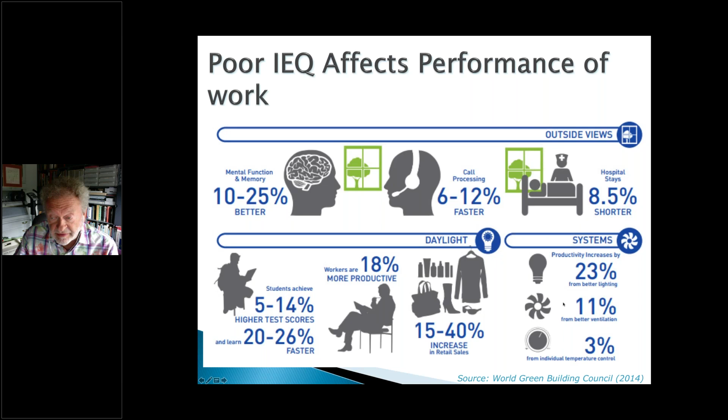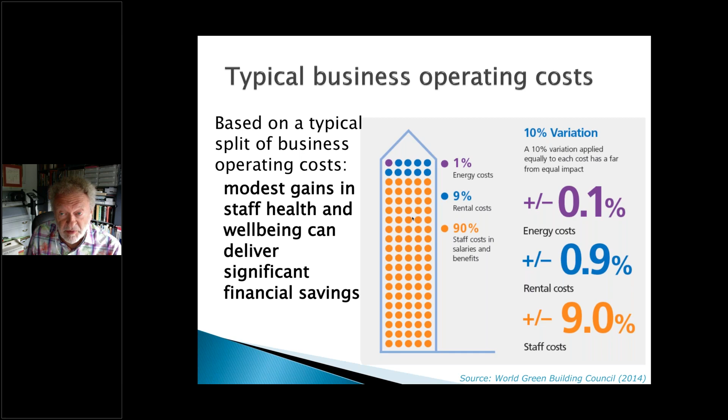When we look at the cost you have in a modern office, it is very important to stress that if you look at the building, the cost you have for salaries and benefits—if you put that at 90%—the energy cost for heating, cooling, and ventilation is only 1% of that. So the performance of people is very significant. You can say about 1% loss of productivity is the same as the total cost for the ventilation and conditioning of the building. So that's very important to have in mind when we now talk about performance and productivity.

And then we have what we often see in modern offices: many people get headaches or runny nose and eyes. We call that sick building syndrome. And we know that by better ventilation, we can reduce the amount of sick building syndrome, which causes loss in productivity of people.

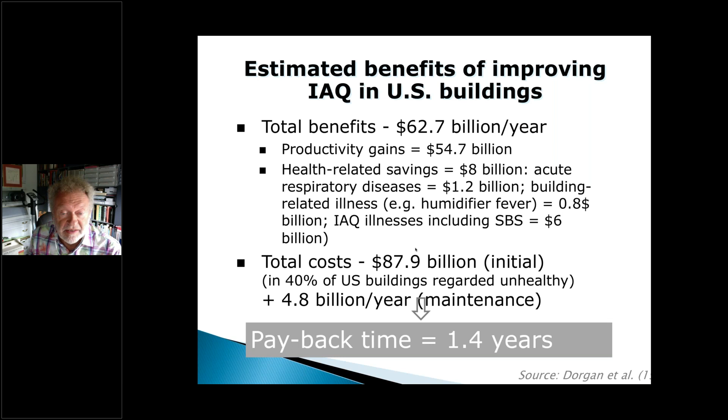So by investing in the indoor environment, there are a lot of gains that you can have. Here are some estimated benefits of improving indoor air quality in US buildings. I will not go into detail, but they have calculated that the benefits will be like 62.7 billion per year, where the cost for improving the indoor environment is close to 90 billion. But since you have yearly benefits, the payback time is only about 1.4 years. That's why the cost of people is much higher than the cost of energy or new installation.

So let's look a little at the exposure of the environment on our body. Here's a couple of numbers which tell us what we put into our body every day. People on average eat maybe around 1 kilo of food, though of course there are big individual differences. We should drink about 2 liters, or 2 kilos, of liquid—here I'm thinking about water. But I don't think many people believe that you are breathing 15 kilos of air every day. So there's 15 kilos of air going down into your breathing system, into your lungs, and coming up again. So you can see the exposure to air on your body, and the quality of that air is very important.

Another important factor is the exposure time—how long are you exposed to a given environment? Most of us spend more than 50% of our time indoors in our home. So the indoor environment we have in our home is much more important for our health and wellbeing than at the workplace. But we're also spending time indoors in public premises, in industry, and while traveling. So altogether, in general, we are spending more like 90% of our time indoors. So the indoor environment is very important for our health and comfort.

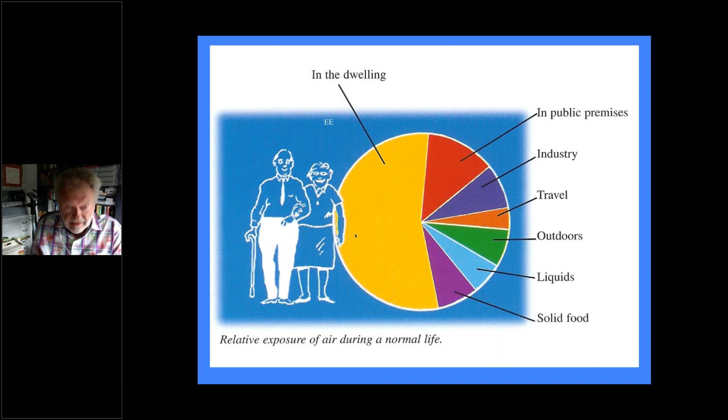So when we talk about indoor environmental quality, there are physical factors that are important: thermal comfort, related to temperature, air velocity, humidity; air quality, which we often relate to how much we ventilate; noise and acoustics; and also lighting or illumination. What's also important is how long you are exposed to given conditions—that's why the conditions in your home are so important, because you spend more time there than anywhere else.

Then there are some personal factors—for example, the activity you are doing and the clothing you wear are important for your comfort, whether you feel warm or cold. We also see some adaptation and change in expectations toward the indoor environment. These are the factors we look at when we want to evaluate if an indoor environment is acceptable.

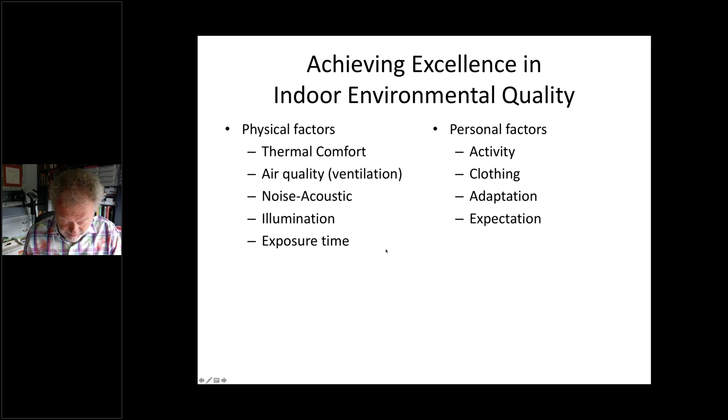There are big differences when we look around the world at what people's exposure is. Here are some data from WHO on the global health impact on people: in developing regions, like 5,000 persons die per day due to poor indoor air quality. That is typically children and women who are exposed to cooking indoors without ventilation, with a lot of particles and different chemicals generated by fires or cooking. In developed countries, we have seen a very significant increase in asthma and allergy, which I will come back to.

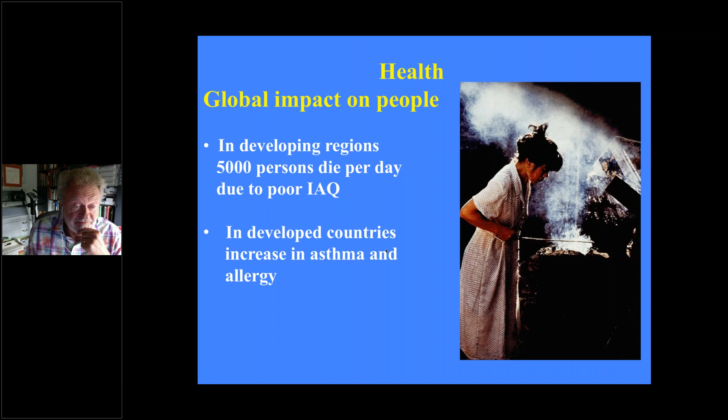But we also have people who are so sensitive that even if we do our best to create the best indoor environment—the best temperatures and indoor air quality—they are still not satisfied. It's like the fairy tale from Hans Christian Andersen, the Princess and the Pea, who is so sensitive she can feel a pea even under 10 mattresses. People are very different, so it's very difficult to create an indoor environment where everybody is satisfied. We have to realize that from person to person, there can be big differences in what they find acceptable.

So I talked about asthma and allergy, and data are showing that it is increasing in industrial countries. We can see that from school children, but also from adults.

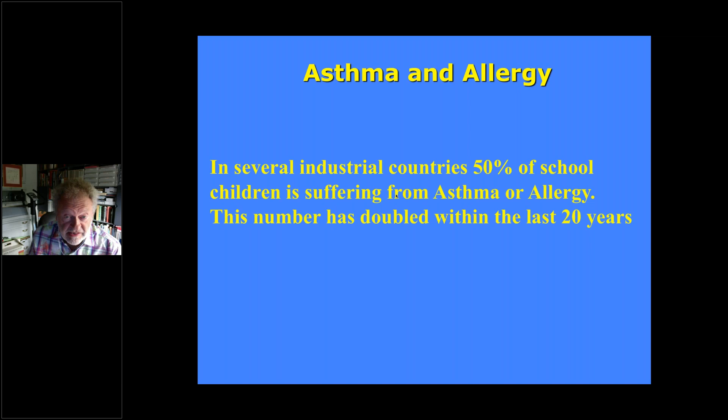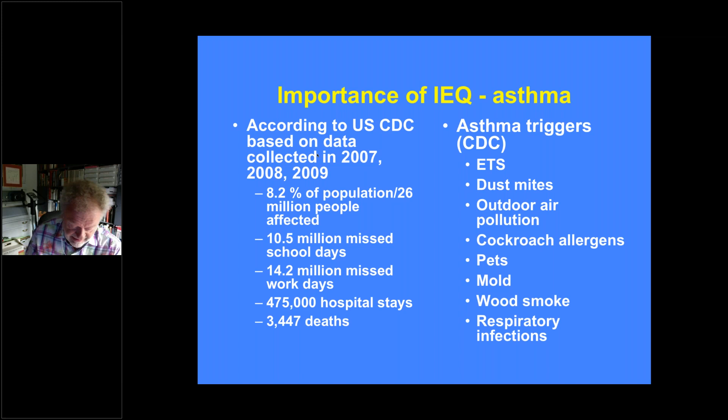In some of the homes we knew there were children, and we tested them to see if there was asthma and allergy, and there were other homes where there was no asthma and allergy. So there were both medical people involved.

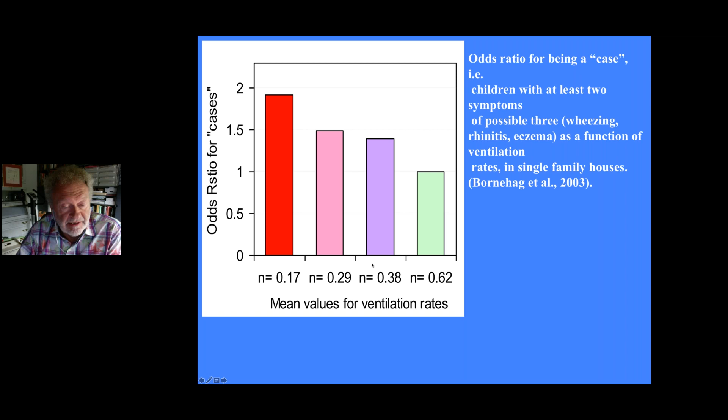When we look at this graphic, on the x-axis we have how much we ventilate, that's how many air changes per hour the homes are ventilated with. The outside air in these areas in Sweden is fresh, very good outside air. We can see here, if we reduce the ventilation, the odds ratio that there is a case of asthma and allergy is much higher. So in homes that are less ventilated, the risk that people get asthma and allergy is higher.

Now, what is 0.38 or 0.62 air changes per hour? I can say, for example, in Denmark, the recommended ventilation rate at home is about 0.5.

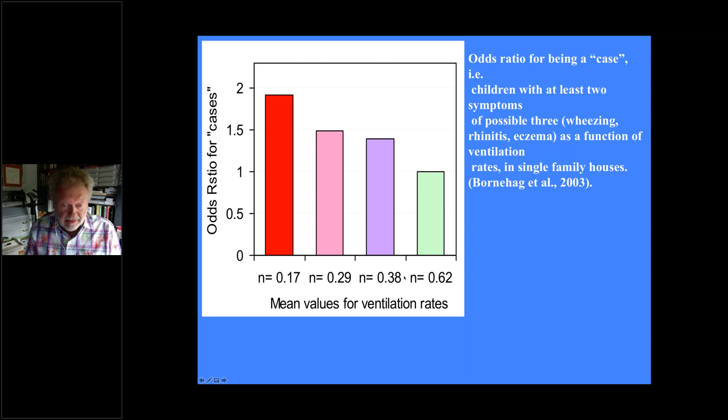We have seen from other studies that this phthalate goes into your blood and can result in asthma and allergy. So it's good to always have a certain level of ventilation. I said in Denmark we recommend half an air change per hour.

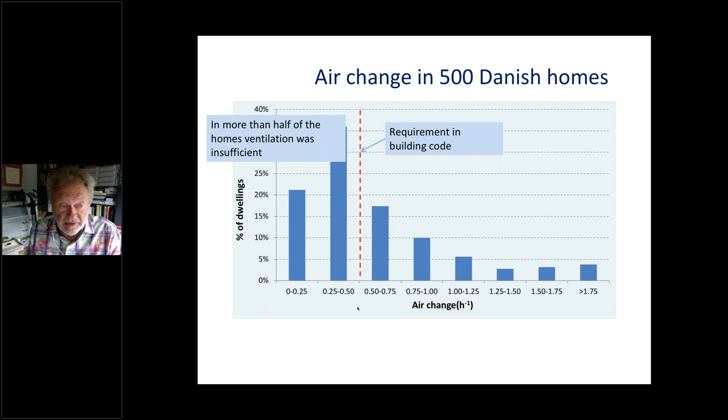Now, I talked about the PVC flooring used a lot in Sweden, that has phthalates and can get into the body of people. But there are a lot of other products, like plastic products, that include phthalates that we bring into our homes. It's through furniture, in our cleaning products, I mentioned toys, in cosmetics, and in paintings. So there are a lot of different chemicals we are bringing into our home, and that's why it's so important to have some level of ventilation.

A big problem is that there are chemical reactions taking place, which is why it's very difficult to do measurements and evaluate the indoor environment and indoor air quality by measuring a lot of different substances. That's why, normally, both in ASHRAE standards and others, we require a certain minimum ventilation.

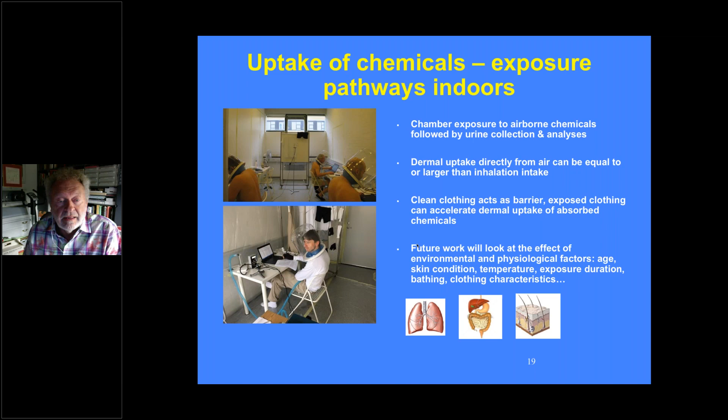So when we want to study the effect of a source, a certain emission from a building material or another consumer product, what is the health effect? What is the effect on asthma, reproduction, autism, obesity, or diabetes? We engineers cannot do that alone. What engineers can do is characterize the sources.

We can measure the exposure—the chemicals, the particles in the indoor air—so we can say what people are exposed to. We can also look at the modifying factors, for example that if you increase ventilation, the source strength will get less. So all of this we can help estimate, calculate, or measure.

But then how it gets into your body through dermal or inhalation uptake—I mentioned we did some studies on that with medical people. We may be able to help find the pathways, but what's happening inside the body, how to analyze blood and urine for what has been absorbed, what the biological mechanisms are, and then explain how it affects health—we need to work with medical people. It's very important to have the whole chain from the source to the health effect. It's not only engineering work.

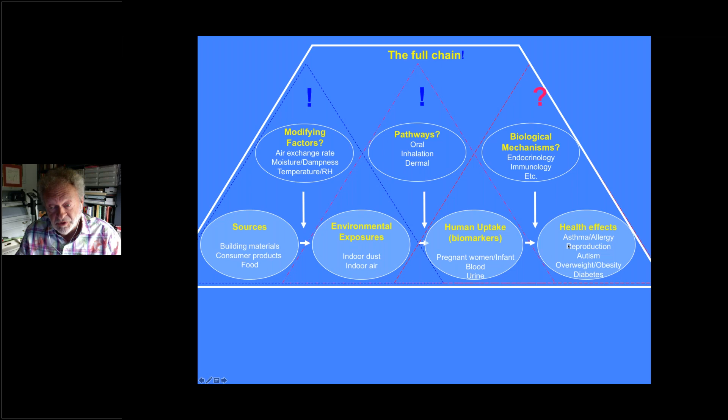Another problem is that some of the health effects are very long-term, not immediate, so it can be very difficult to detect.

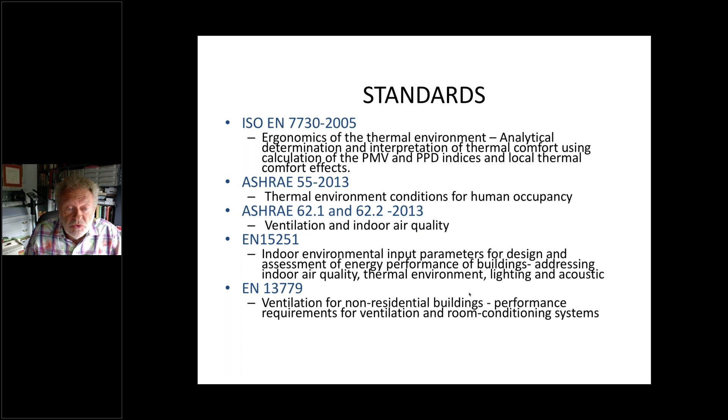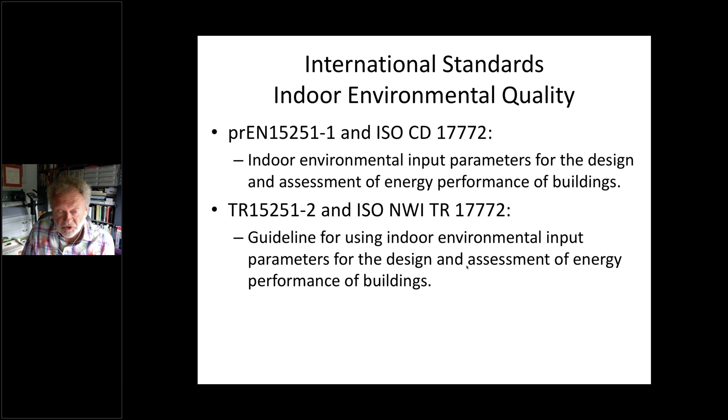To help people design buildings and systems, we often use standards—international standards from ISO, European standards, and ASHRAE standards. There are two newly released standards which are very similar: one is an ISO, now a full standard, still marked as CD but actually complete, and there's a European one. These deal with parameters for the indoor environment—thermal environment, indoor air quality, acoustics, and lighting. Similarly, India has a standard dealing with the indoor environment, and these are somewhat related to the international standards.

So now let's look a little at exposure to the thermal environment and how it influences productivity.

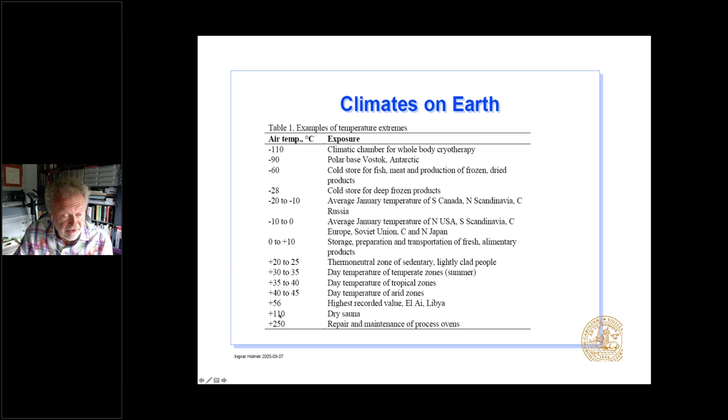We are capable by different means to work in environments that go from -110 close to that. For example, in the Antarctic, you have -90, where people work, but because of protective clothing, they can do that for some time. And we have people exposed voluntarily to very high temperatures, like 110 in a sauna, but also people who do repair on ovens, for example, in glass factories. So by protective clothing and other means, we can work in a big range of temperatures.

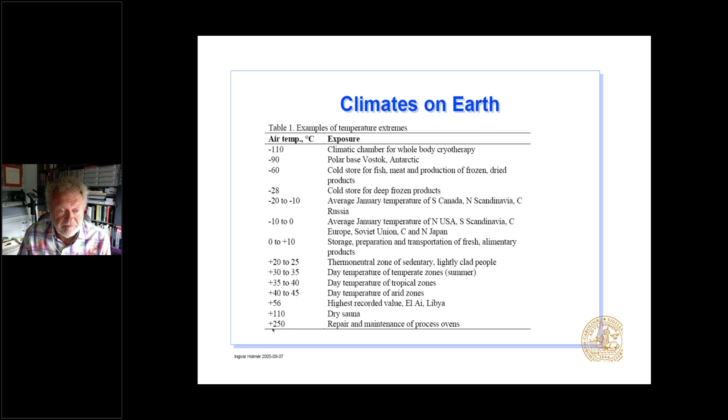But if we look at our body temperature, we can only survive in a very narrow range of 6 to 10 degrees. So what's important for us is that the body temperature for our health does not change very much. So we need to have a heat balance between the heat we are producing by the work we are doing.

Here the weightlifter is lifting a weight and his body generates heat. This heat is released to the environment by convection to the air, by radiation to the surrounding surfaces, by evaporation, which when it gets warmer and warmer gets more and more important, and some heat exchange, but very little by respiration and direct contact with surfaces.

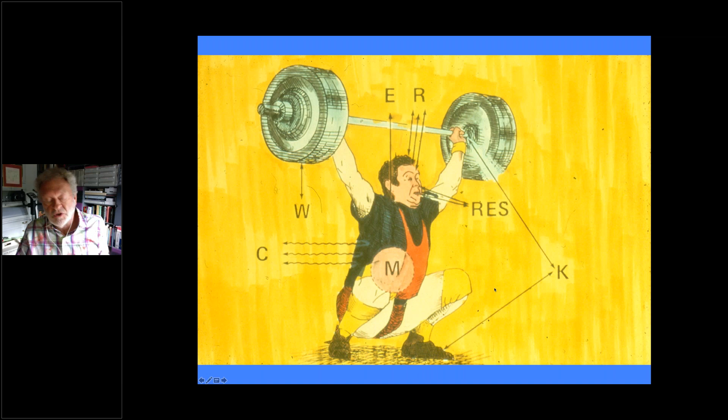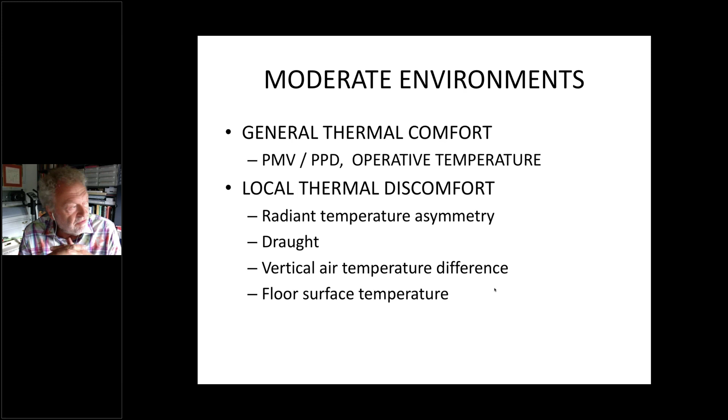So this heat balance has been important for establishing some of the criteria we use to evaluate indoor comfort. And today we express general thermal comfort either by a level of operative temperature, or there is an index we're using, the PMV-PPD.

But there are also influences of what we call local thermal discomfort, from too high air velocities, which sometimes can be beneficial if you're too warm, but in air-conditioned places it's often a disturbance if you have too high air velocities.

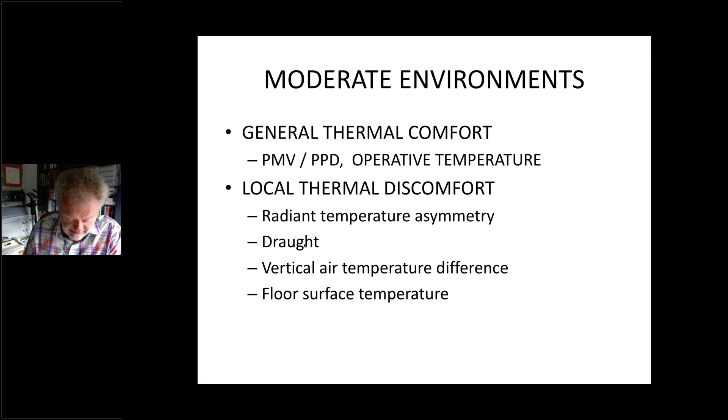If you are close to the optimal comfort, around 0, you also have the optimal performance. It seems like if you're just a little on the cool side of the neutral temperature, you have the highest performance. If it gets colder, the performance goes down. If it gets warmer, the performance also goes down.

When it gets warmer, people get more tired, they get headaches, and they lose concentration. When it gets colder, for example if you're working on a computer keyboard, fingers get more stiff, and you make more mistakes. So for temperature, there's reduction both on the cool side and on the warm side.

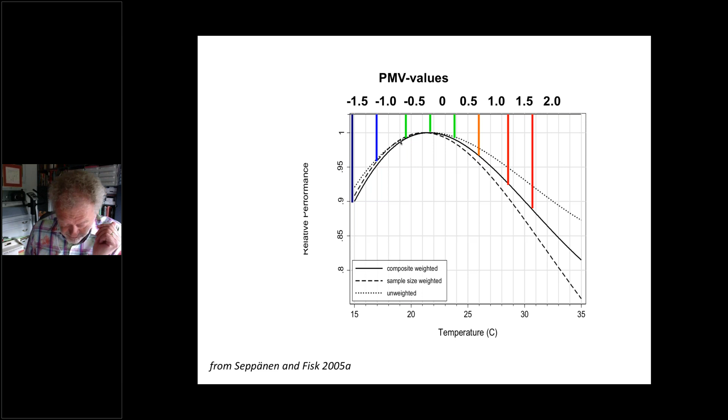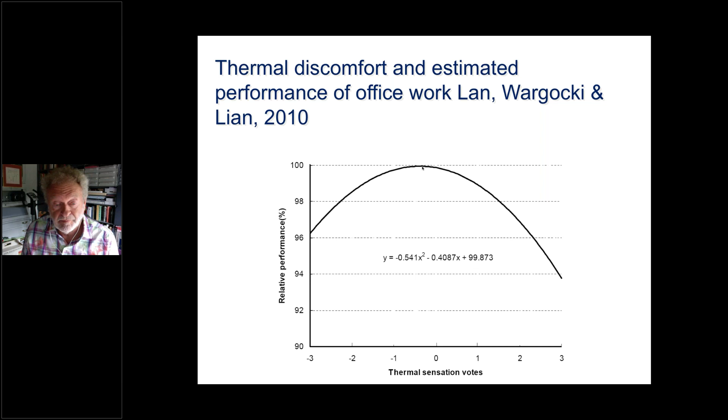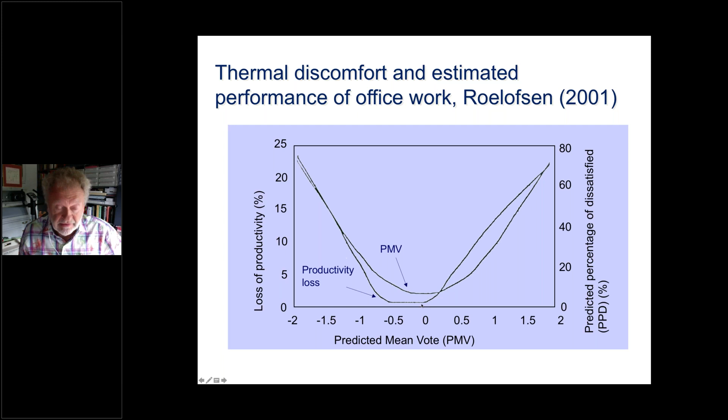Here are studies from offices in the Netherlands. Again, our index for comfort, and you see the optimal for productivity, where you have the lowest productivity loss, is just a little on the cool side of comfort.

When we now look at the effect of air quality on people's productivity, we should look at the standards we use today for indoor air quality. We normally describe a required level of ventilation rate - that's what we do in the ISO and ASHRAE standards. We can also require that a certain number of substances have concentrations below a certain value, which you will find in the Indian standards.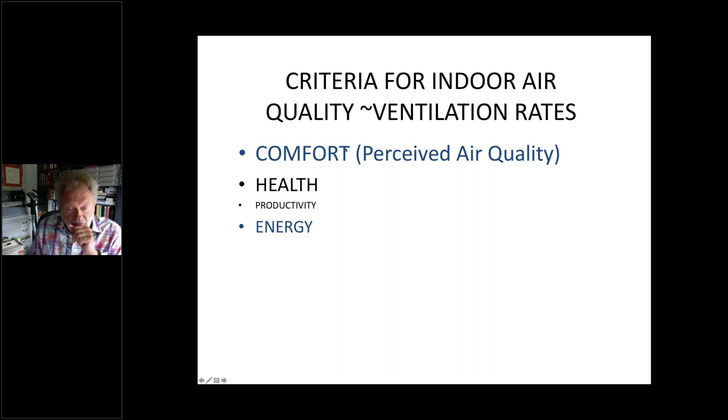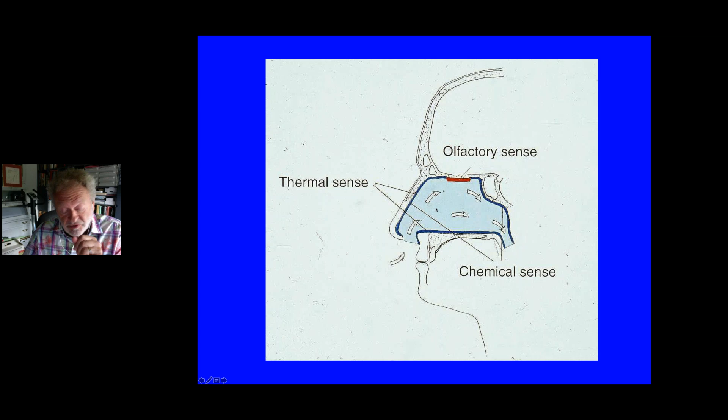A lot of these requirements are based on studies related to perceived air quality - that you feel the air is fresh - not alone to health or productivity. Our sensation of air quality takes place in the nose. Here we have the olfactory sense. We also have a sense of irritation, or the chemical sense, in the nose. And this is somewhat influenced also by the temperature and humidity of the air, which influences how fresh you feel the air.

We have done many studies in Denmark, but also other places, on the relation between how much you ventilate per person and how people who come into the room feel, how satisfied they are. And today, as a baseline, we often say to get less than 20% dissatisfied, you have to ventilate more than 7 liters per second per person.

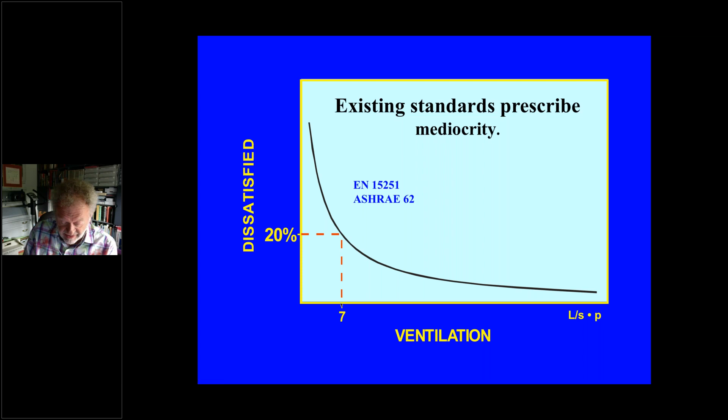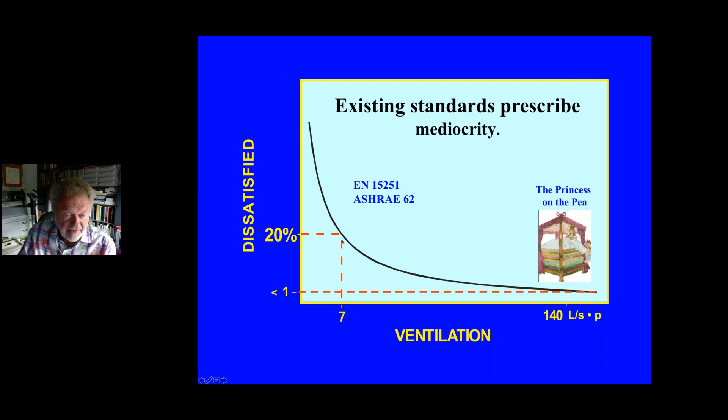If we were going to satisfy the very sensitive people, we would have to have a very high level of ventilation, which would be technically almost impossible. So we work with differences here, 10 to 30% dissatisfied, and establish what is a required ventilation.

Now, it's not only people who emit chemicals to the environment or pollute the air. We also have a lot of other sources coming from building materials, furnishing, even from the HVAC system and other equipment. We have to take that into account also when we want to evaluate the indoor air quality and find how much we should ventilate.

Earlier indoor, we also had tobacco smoke, but normally in our standards today, we don't take that into account.

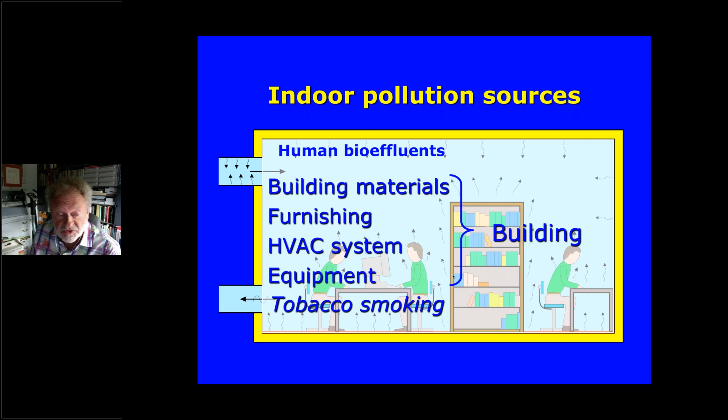We can also use, and that's what's used in the Indian standard, a mass balance approach, where we need to know what is the generation rate of a certain pollutant. It could be formaldehyde. We also need to know how much is outdoor, and what is the guideline value for an acceptable level or health limit of this source. The problem is, for many components, we don't know what the health limit or comfort limit is. So that's why we normally recommend a certain minimum ventilation.

Ventilation also has an impact on people's performance. Here are data compiled by Seppänen and Fisk some years ago, from different studies. The reference was 7 liters per second per person, or 6.5. If you increase ventilation, you improve the relative performance. And remember, 1% performance improvement is about the same as the energy budget.

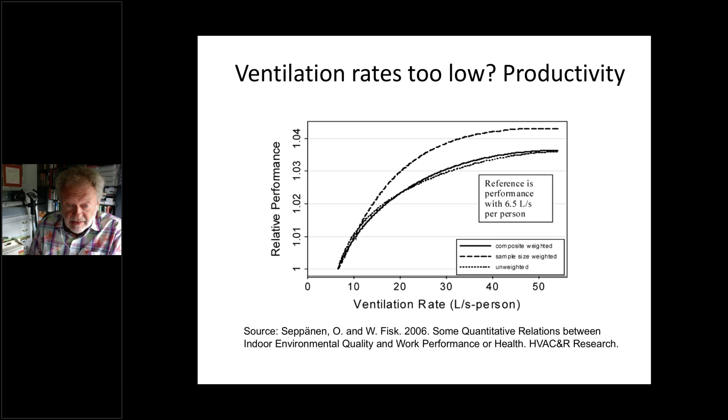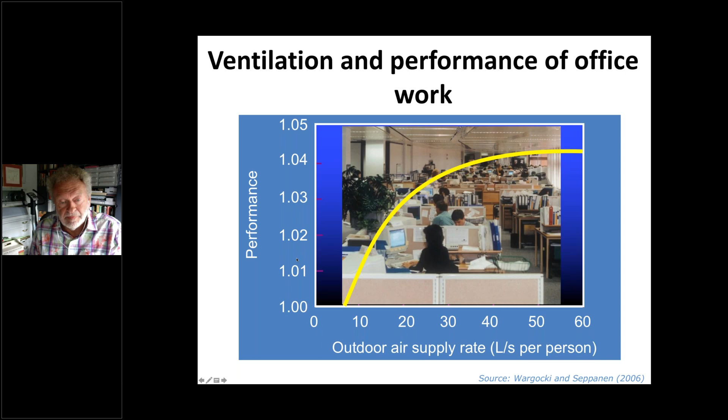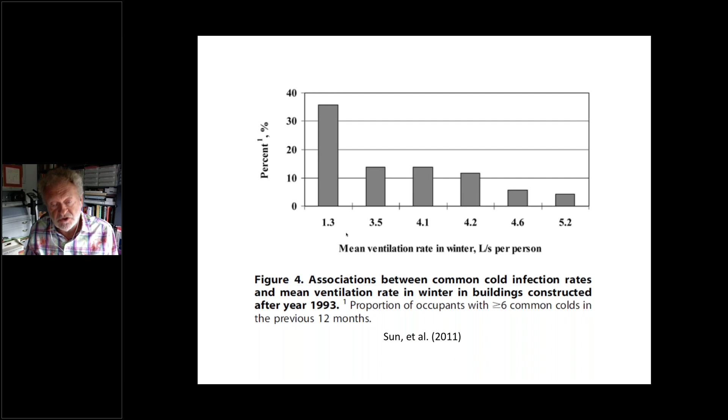I said I wouldn't talk about COVID-19, but higher ventilation does help reduce the risk of contamination. So ventilation is important there too.

I'll skip that and talk a little about how we measure performance. How do we study how well people are working? I'm going to show both a laboratory study and how we do the study in the field.

One example is where we have an office-like room. We can control temperature, humidity, noise level, lighting, everything. We have more or less a bare room without any sources of pollution except the people themselves and the work they're doing.

So they come to do this measurement, where they do different activities on their computer. They have different tests to see how well they work, how many mistakes they make. Typically it takes a 3-hour experiment, and they have a comfortable temperature.

Then they come a second day, where we now had put a source of pollution behind the screen. They cannot see it—it looks the same as when they came without this source. In this case, it's an old carpet, which has the same area as the floor area. In this study, the rooms were ventilated directly with outside air.

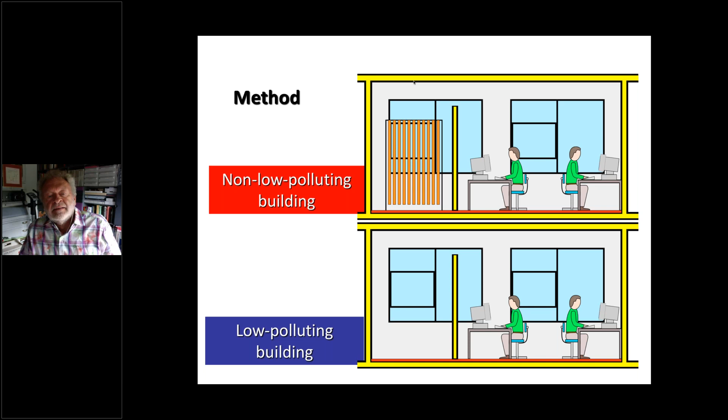And then we look at whether there is any influence on their performance, how fast they work, or how many mistakes they make.

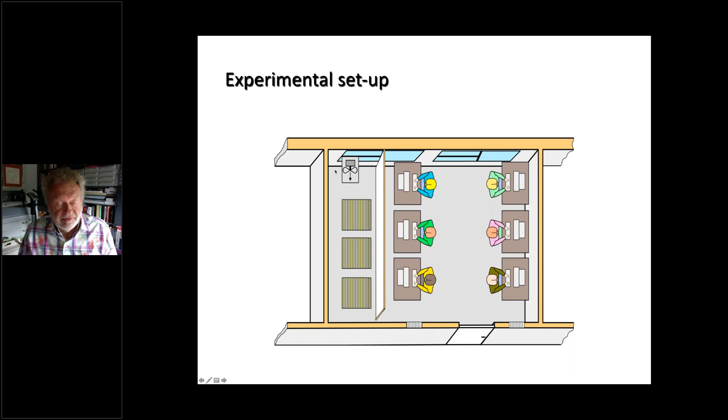So a typical setup is we have 6 people and they come twice. Here we have the pollution source, here we have ventilation. Temperature, humidity, and sound level are the same during the 2 exposures. In this case, we are studying 6 women who do work on the computer.

It's always best to do productivity studies when people are at their workplace. If they come into a kind of laboratory setting, they normally work better. So what we have done is studies in call centers. Some of our colleagues at the National University of Singapore have done similar studies, and we found similar results. In these call centers, we could go in and increase the ventilation, and we could go in and change filters from the old filter sitting there to a new fresh filter.

And we could do that without people knowing. So they were working one week on one condition, then a week on another condition, then back again to the first condition. What we used, which may be difficult to see, was the measure of performance as the average talk time—how long the call center staff spent per customer per day. So the more customers, the higher the performance.

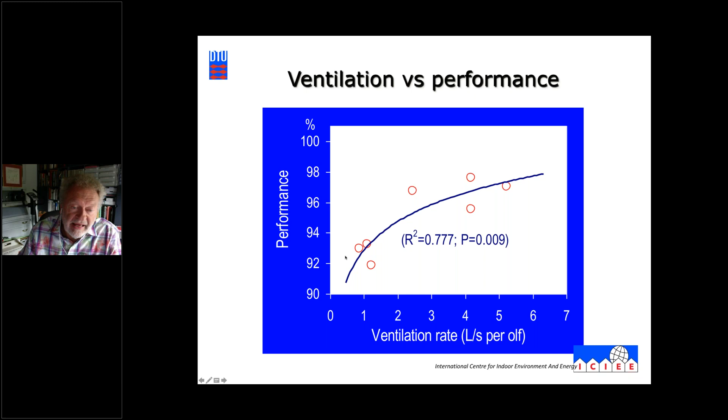So by doing these studies—changing filters, changing ventilation rate, and combining results from Singapore, Denmark and others—we found a significant relation between how much we ventilate per olf and the relative performance. That's how we do these studies.

It's often been difficult to see the importance of these studies because how do you put money on years of life lost? What is the cost of that? What about years lived with disability? What is the cost of that?

But there is a trend in the research community to use something called DALYs, disability adjusted life years. So we estimate that a certain exposure will give you more sick leave, more sick days, or you may die earlier, and we evaluate what that will cost in DALYs, disability adjusted life years.

There is a World Health Report, including from the World Health Organization, dealing with this performance index. I won't go into detail, but I'll show some examples from a project we had in Europe to look at it. We could estimate that about 2 million healthy life years are lost every year in the EU due to exposure to indoor pollutants.

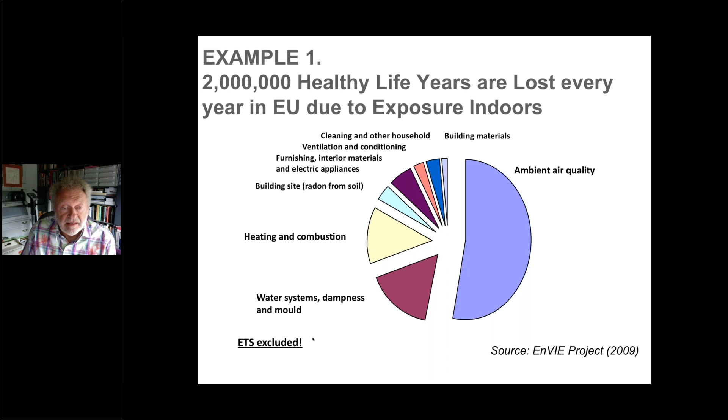So let's look, as I mentioned earlier, at the end a little on schools, because teaching and learning is very important. We often see that school children are getting sleepy, and the question is, how efficient is the learning?

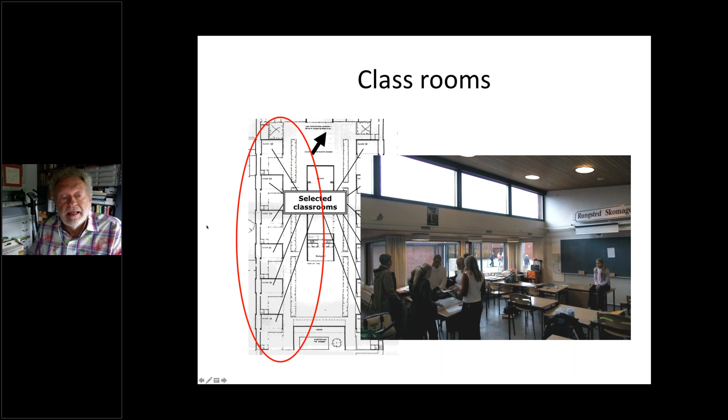So we did a study, an ASHRAE study. Several of our studies have been part of the ASHRAE research program, and this classroom study—we have another one now, but this was some years ago—was part of ASHRAE's research program. We had a school with several classrooms with the same direction to the sun, so the exposure would be the same. In those schools we made a couple of modifications.

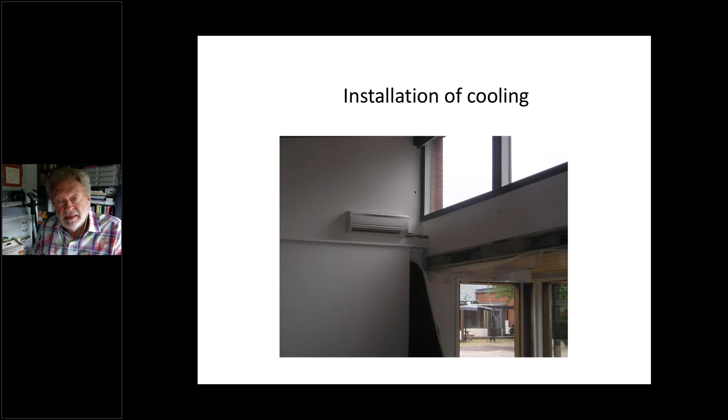Normally in Danish schools they cannot control the temperature, so in some classrooms we put in a split unit so we could control the temperature better, so it didn't get too warm in spring and summer. We also increased the fan speed without increasing the noise in the space, so we increased the ventilation rate. Again, the students didn't know when we were controlling temperature or when we had a higher ventilation rate. They were in the same classroom with the same teachers. The teachers knew some experiments were going on, and of course the parents knew too, but they didn't know which week we had changed.

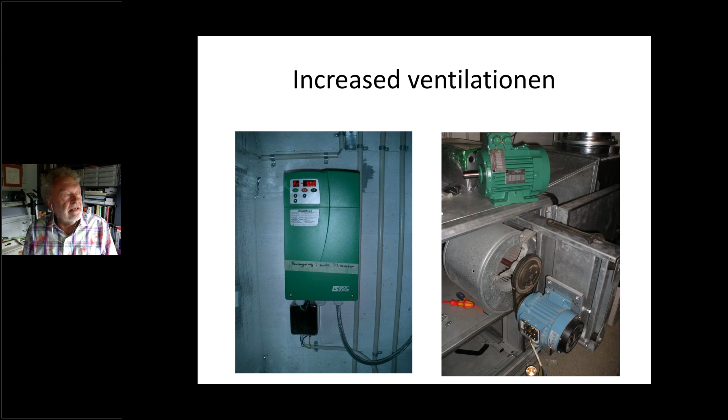Again, what we normally do is make it better by increasing ventilation, then go back to standard ventilation. This gives a much better statistical analysis of the data. During classes, the students had different tests, in language and in mathematics. There were three different tests.

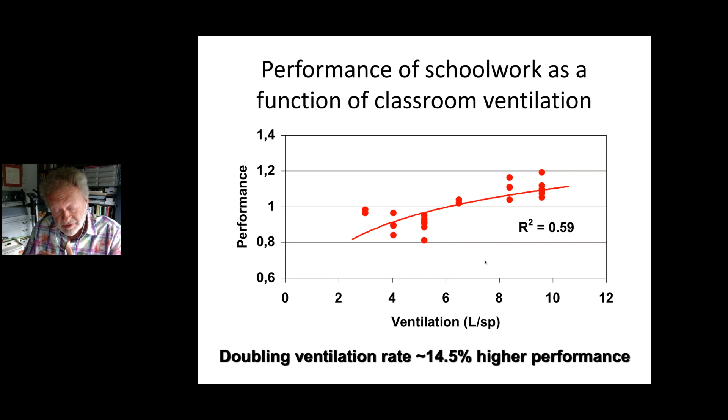Offices we normally ventilate with about 10. So if we double the ventilation in schools, we could increase the performance by about 14-15% of the school children. To get a feeling about what that is, if you learn faster and more efficiently by 14-15%, instead of going 7 years to school, you only need 6 years. So these are significant impacts.

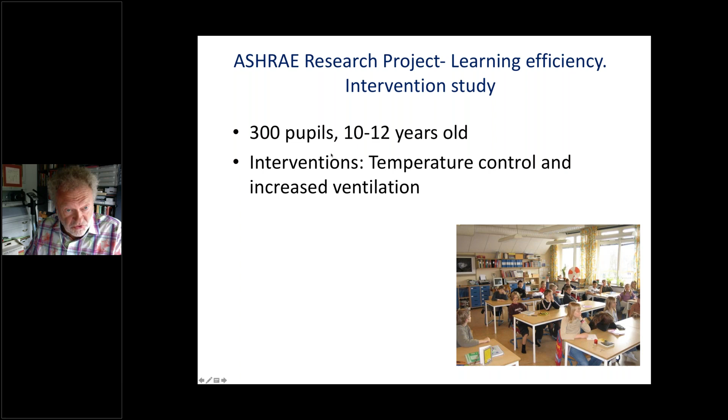This project was sponsored by an ASHRAE study, and we also went out and looked at how the ventilation was in several schools. We had the schools we studied, but also looked at many other schools around the country. We tested in more than 1,000 classrooms. You would think in Denmark, knowing so much about ventilation, that all classrooms would be well ventilated.

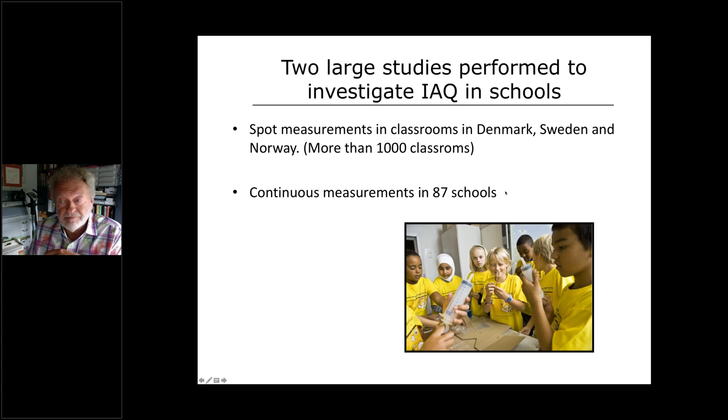Whereas if you looked at schools in Sweden and Norway, only 10 to 15% were at an unacceptable level. In Denmark, 44% was okay, but more than 50% was not acceptable. So we have at the moment a big discussion about how we can improve ventilation in schools.

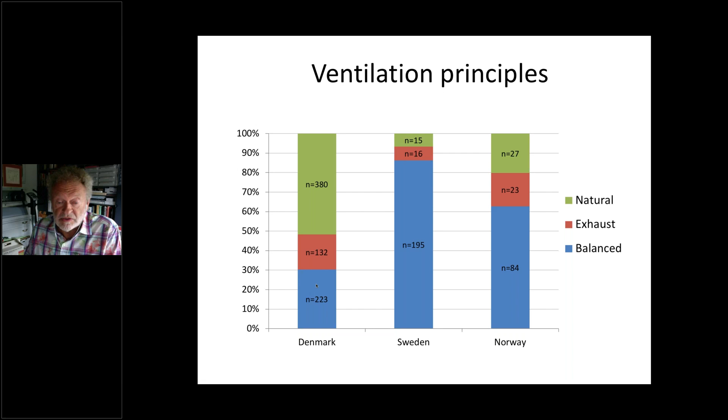One reason why Sweden and Norway have better ventilation in schools is that a bigger percentage have balanced ventilation, which you can better control. In spring, fall, or summer, it's not such a big problem to open windows—you can get a lot of ventilation. But here in Scandinavia in winter, when the outdoor temperature goes below 10 degrees, you don't want the window open because it gets very drafty and thermal comfort becomes unpleasant. In Denmark we have far fewer schools with balanced ventilation, but nowadays all new schools will have balanced ventilation.

The last thing I want to talk about is something people tend to forget: the room where we normally spend most of our time during a day is the sleeping room. People sleep between 6 to 8 hours every day, or most people do. So the indoor environment in your bedroom can have an impact on how well you sleep, and that will affect your next day's performance. If you haven't had a good night's sleep, your next day's performance will be less.

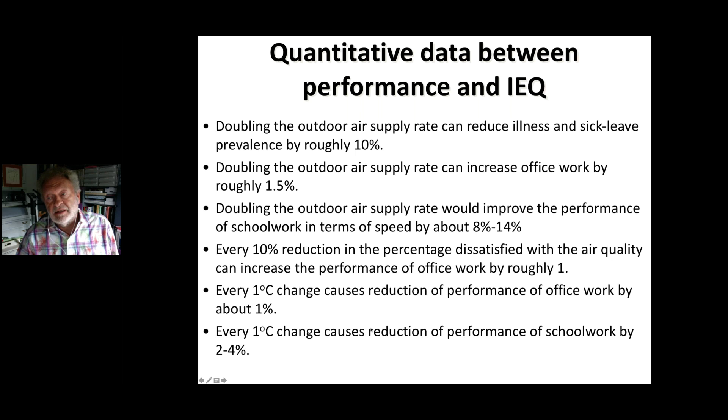A 10% reduction in people dissatisfied with air quality can increase performance by roughly 1% - and remember how much 1% is. Every 1 degree change causes a reduction in office work performance when it gets warmer, by about 1%; it gets better when it gets colder. For schoolwork, every 1 degree change causes a 2 to 4% reduction in performance. But remember, it can also be too cold.

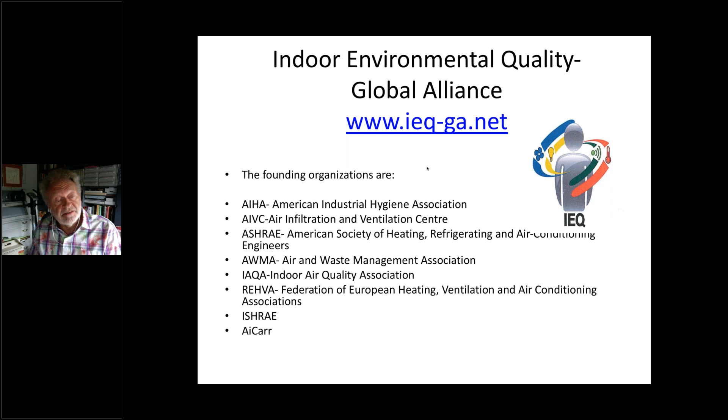We have just started to see what we can do, how we can speak together with WHO, the United Nations and others, and try to make sure we don't sacrifice the indoor environment. Focus has very much been on reducing energy, and what we try to ensure is that when we reduce energy, we don't sacrifice the indoor environment. There are a lot of people who have an influence before you get a final acceptable indoor environment.

The designers of buildings and systems need tools from building research to know what to do before the building exists - estimations and calculations on the exposure of people to design the systems. We need occupant comfort and health research to set limits on what are acceptable temperatures, indoor substances, and so on, which can then be used in the design.

But that's not enough. We have to make sure manufacturers are producing equipment that doesn't make things worse but improves them, and that installations are done well. And finally there's the operation of the building. Here, the occupants themselves have influence, and sometimes they don't do the right thing - so occupants may influence it in a bad way. We need to take occupant behavior into account.

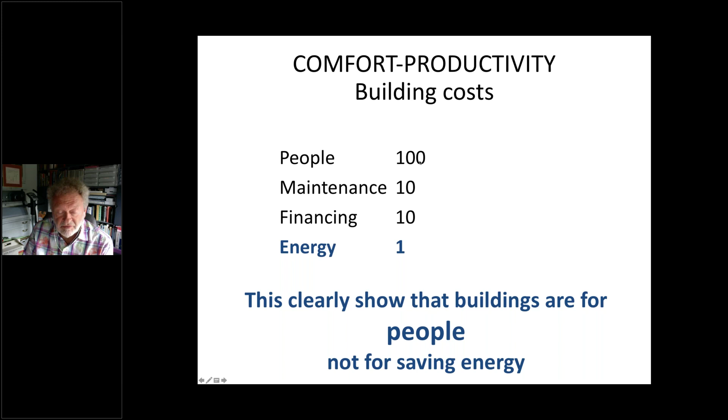So at the end, I just want to stress that if you look at building costs in modern offices or modern commercial buildings, the energy cost is only about 1% of the cost of people. So buildings are for people - they are not for saving energy. We should not sacrifice the performance of people to save that 1%. The important thing is to save energy, build very efficient buildings and systems, but keep a high level of indoor environmental quality. Thank you.

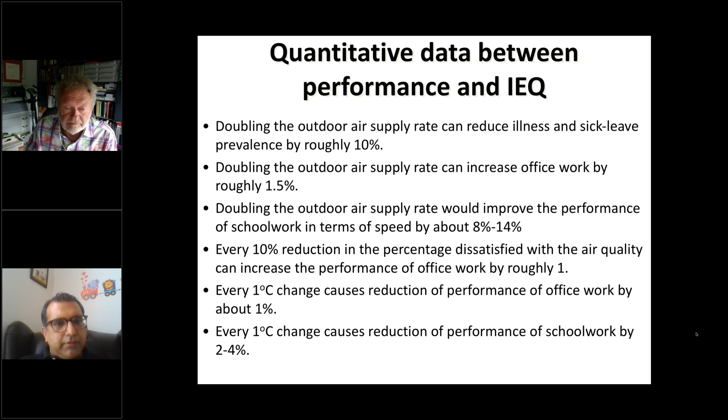One question Nassim Tamari is asking: why is MRT still not being practically implemented as an alternative measure to indoor air dry bulb temperature?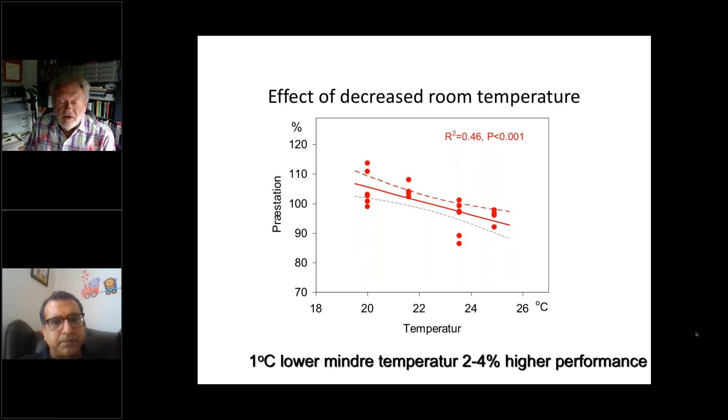Well, in all cases, in all my results I'm showing, it is always an average value between air and MRT, what we call the operative temperature. And today's standards give the requirements as operative temperature. Now, the difference between air temperature and mean radiant temperature depends on the type of building, but also on the type of system.

So if you, for example, have an air conditioning system, you cool the air. The surfaces you have from the outside wall and window will normally be very hot because of the sunshine and the higher outdoor temperature. So your mean radiant temperature will be higher than your air temperature.

If you had what we call radiant cooling, if you had cooled down the surface - we see also in India there are several building projects where they're using radiant cooling - in that case, you compensate the warm radiation from the window with what you can say cold radiation from a cool surface. And in this case, the difference between air temperature and MRT is not so big.